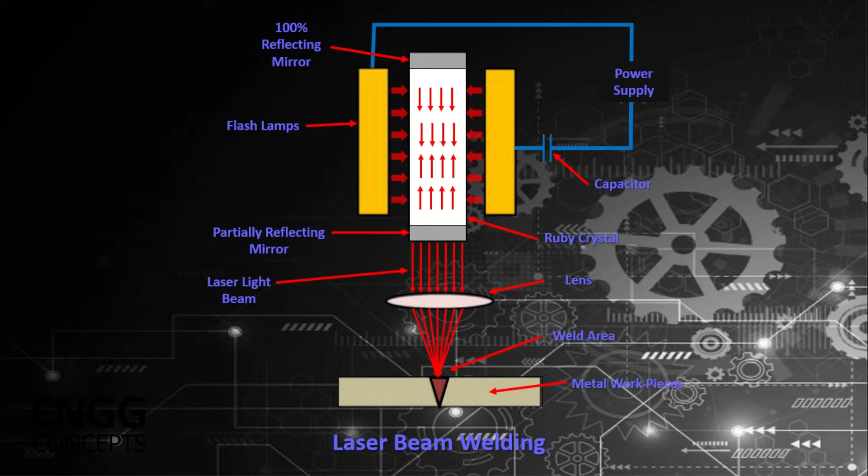In this video, we will discuss how a laser beam welding machine works. What are the various components of a laser beam welding machine? What purpose does the CAM, CAD, and shielding gas serve for the laser beam to work? So without any further ado, let's get started.

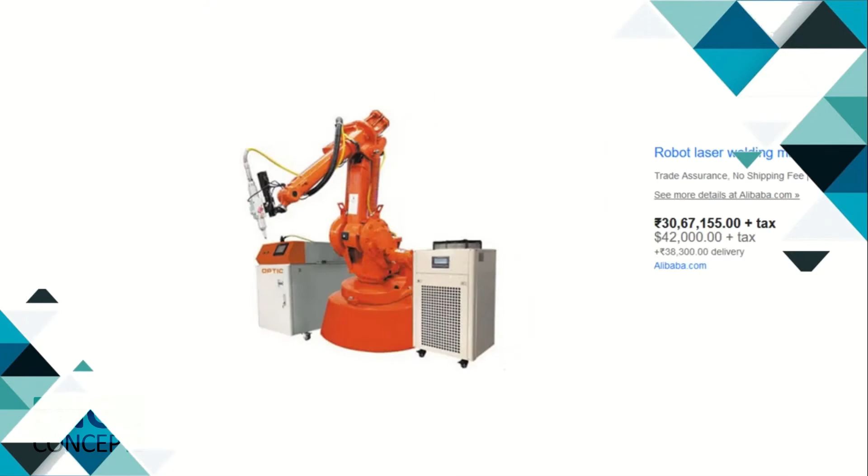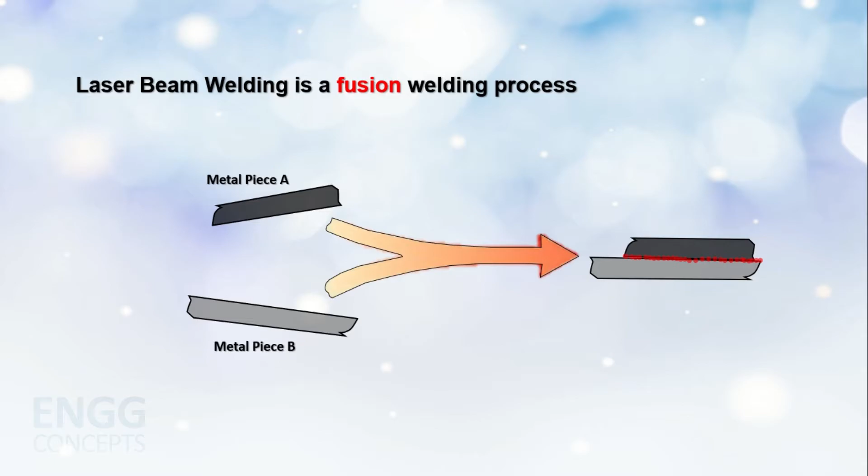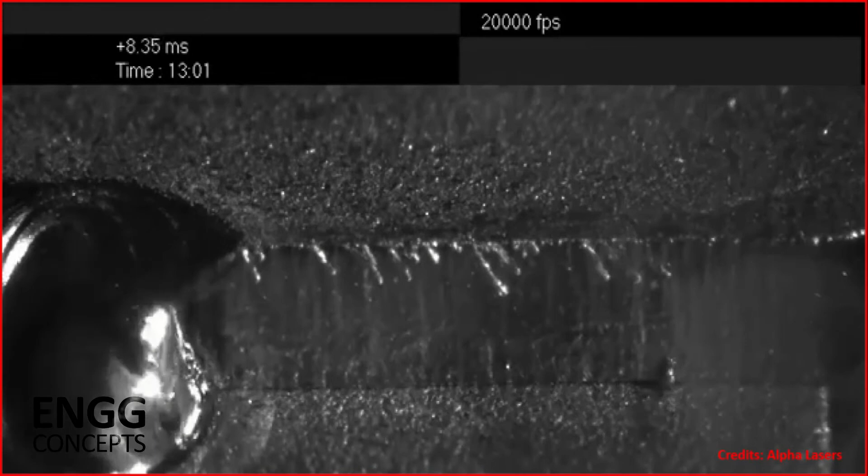Laser beam welding is a fusion welding process in which two metal pieces are joined together by the use of laser as a heat source. The laser beam is focused on the two metal pieces to be joined. The heat produced by the laser beam melts the material from the two pieces and fills the cavity. After solidification of the metal, a strong weld is formed between the two metal pieces.

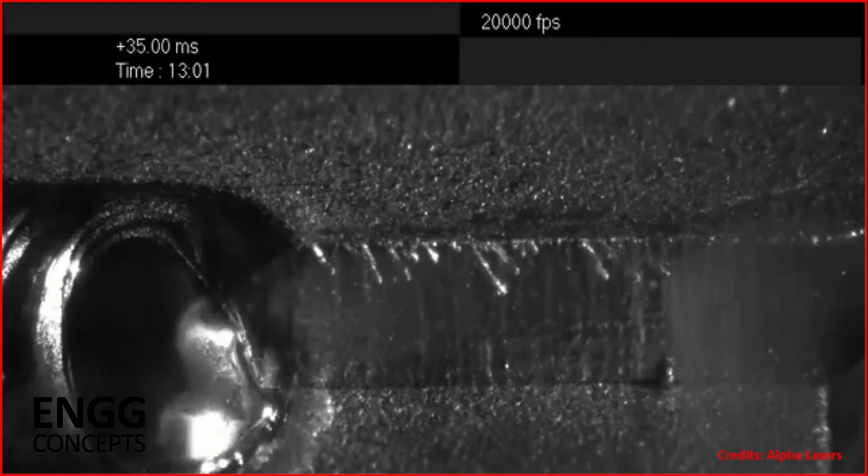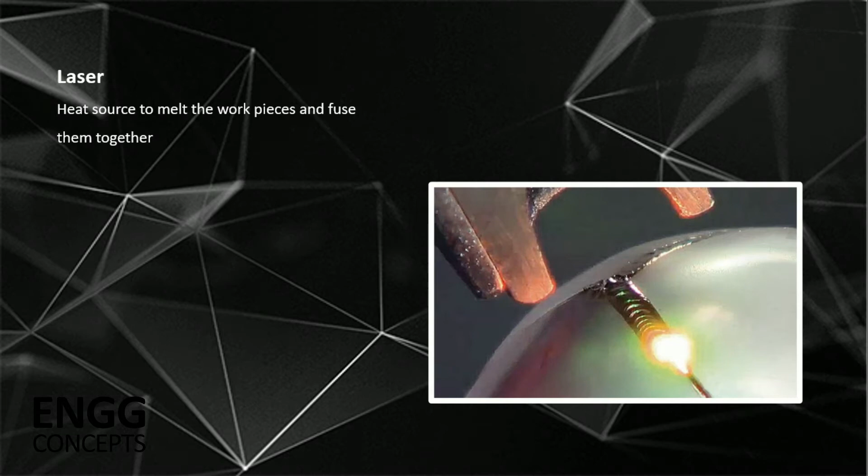Now we have the basic understanding of laser beam welding. Let's see the main components of laser beam welding. The first component is the laser, which is one of the most important components of a laser beam welding machine. We use laser as a heat source to melt the workpieces and fuse them together. Laser is a device that is used to produce heat for welding. These are the main components of the laser.

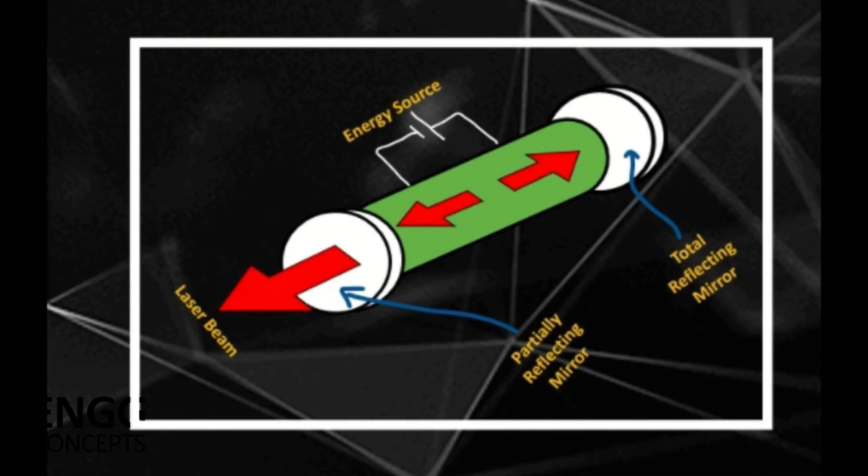Next component is the power source. A high voltage power source is required. This power source is connected to the laser to produce a laser beam, which produces sufficient heat to melt the workpiece. Next component is CAM, which is another important component for the laser beam welding machine.

CAM stands for Computer Aided Manufacturing, which means in laser beam welding, the laser is integrated with computers to perform the welding operation. All the controlling action during the welding process by the laser is done with the help of CAM. Is it necessary to use CAM?

Why is CAM important in laser beam welding? CAM is essential because compared to manually operated machines, CAM generally offers greater speed in producing components with increased accuracy and consistency. Well, not every time exactly - we need to calibrate periodically, like once a week or frequently. But it is way much better than operating the laser manually, and we never get the same result if we operate the laser manually. So CAM speeds up the welding process significantly.

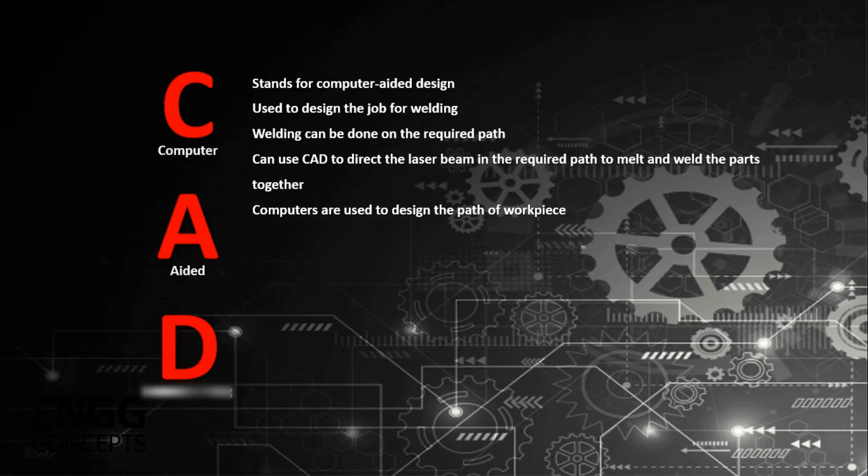And now let's talk about the shielding gas. A shielding gas may be used during the welding process. Why do we use shielding gas, and what is its purpose? The primary purpose of using shielding gas is to prevent exposure of the molten weld pool to oxygen, nitrogen, and hydrogen gases, which are present in the atmosphere.

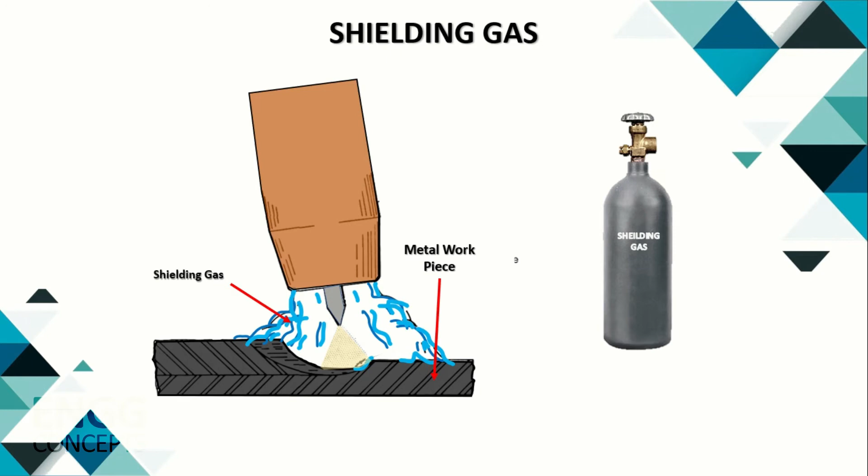The reaction of these gases with the weld pool can create a variety of problems like porosity, which are holes within the weld bead. These holes make the welded joint weak and can cause failures. The shielding gas also helps to prevent excessive spatter.

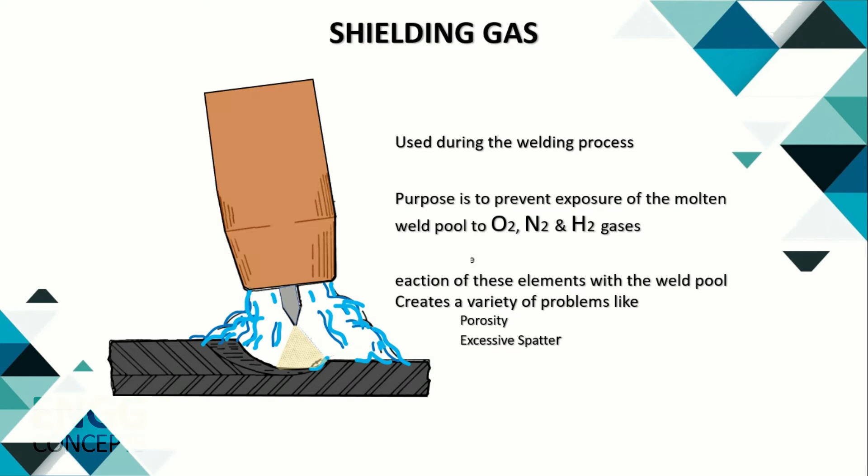Now let's see the working of laser beam welding. The first thing to do is set the welding machine at the desired location. We need to position the laser beam welding machine in between the two metal pieces that we want to join together.

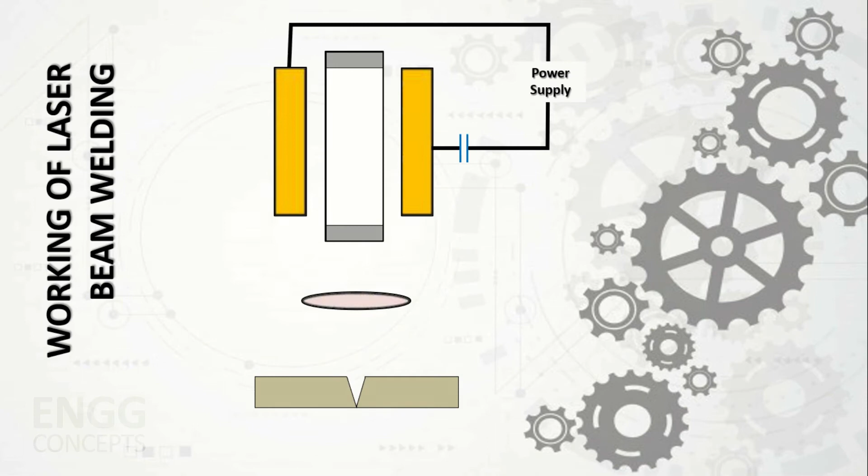After setting up the laser beam welding machine, a high voltage power supply is applied to the machine. This starts the flash lamps of the machine and it emits light photons. This energy of light photon is absorbed by the atoms of the ruby crystal, and electrons get excited to a higher energy level. When the electrons return back to the lower energy state, they emit a photon of light.

This light photon again stimulates the excited electrons of the atom and produces two photons. This process continues, and we get a concentrated laser beam. This highly concentrated laser beam is focused on the desired location of the two workpieces to weld them together.

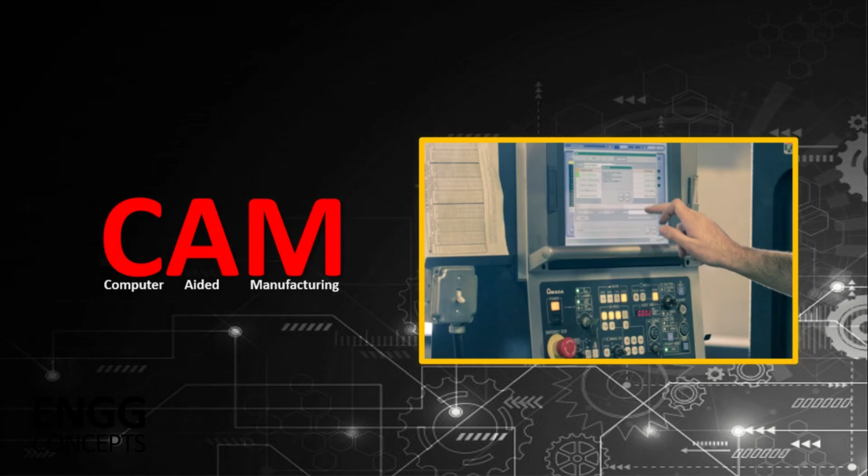To focus the laser beam on the required area where we want to weld, we need to use a lens. CAM is used to control the motion of the laser and keep the workpiece stable during the welding process. As the laser beam strikes the cavity between the two metal pieces, this high intense heat of the laser beam is enough to weld the two workpieces.

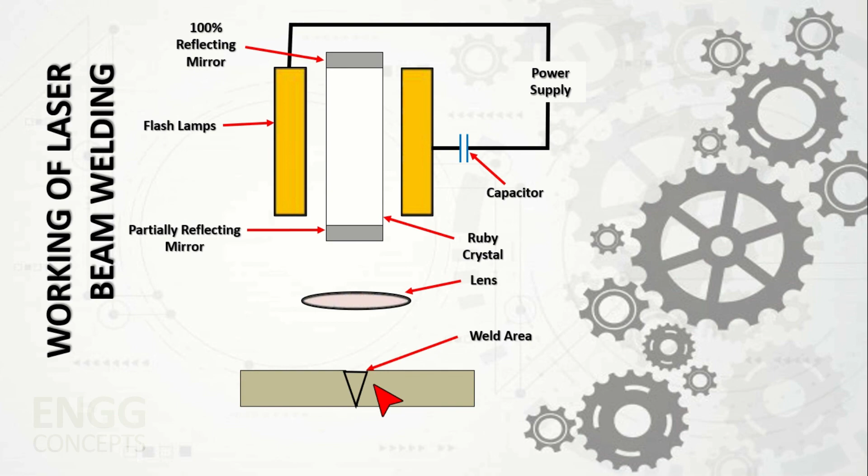This intense heat melts the base metal from both pieces and fuses them together as a single piece. After solidification, we get a strong weld, and this is how the laser beam welding works. Thanks for watching.